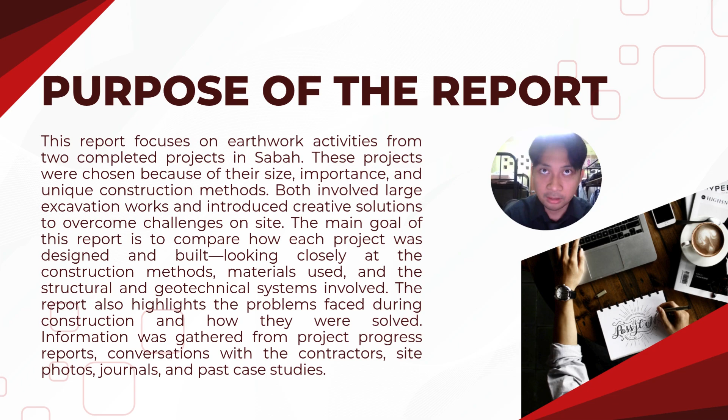The main objective for this report is to do a comparison between the characteristics of soil, problems and solutions that have been faced and taken, and construction technique.

What is earthwork? Earthwork is the work that involves digging, moving, and compacting soil and rock to prepare the ground before building anything. The tasks include clearing the site, excavation, cut and fill, and compacting the soil.

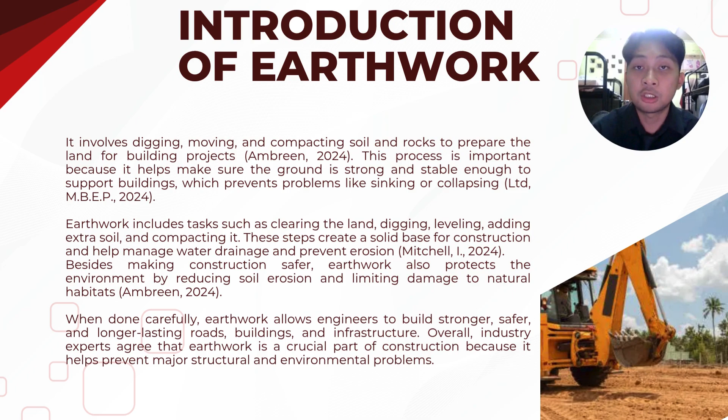Earthwork is also a crucial part because it can help to strengthen the ground to support buildings, prevent settlement and structural failure, and it can also improve drainage and reduce erosion. The important part is it can ensure the safety of the occupants of the building.

The first project that I will be presenting is Menaiktaraf Jambatan Sungai Moyog, Stesen Perikanan Babagon, Kampung Timpango, Kampung Lotong Penampang. This project was carried out by Bisajuta Sdn Bhd. The contract value for this project is RM 16.8 million with a 24 month construction period.

This project was officially started on 10 July 2022 and successfully completed on 9 July 2024. This project was part of the government initiative to improve rural infrastructure in Penampang, aiming to stimulate economic activity in the region.

The primary objective was to upgrade and enhance the existing bridge crossing Sungai Moyog, which plays a vital role in connecting Stesen Perikanan Babagon with the nearby villages of Kampung Timpango and Kampung Lotong.

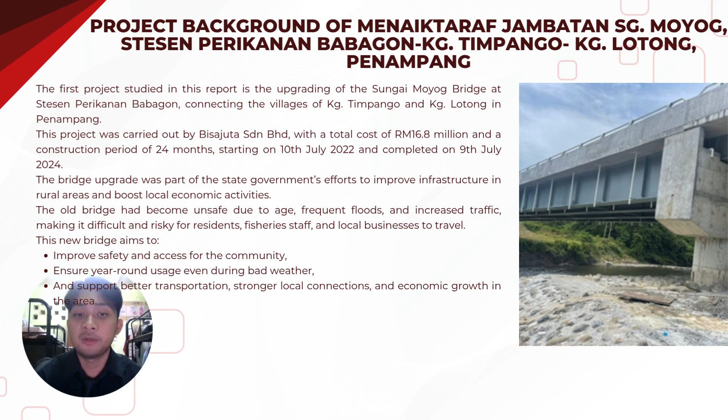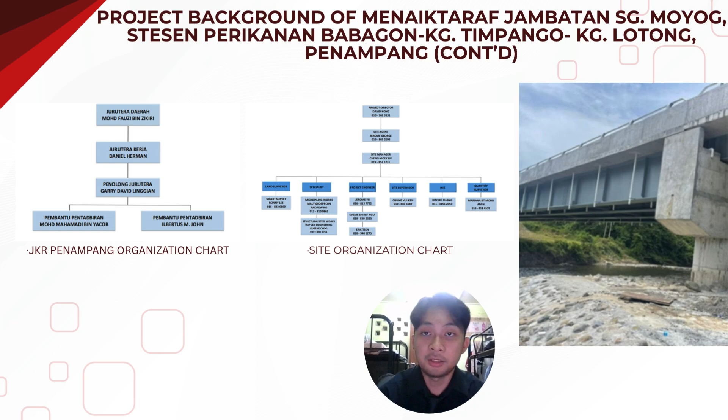So these are two organization charts that we can see. The first one is the JKR organization chart on the left, and on the right is the site organization chart.

Now, let's look at the geotechnical conditions at the project site for the Menaiktaraf Jambatan Sungai Moyog, Stesen Perikanan Babagon, Kampung Timpango, and Kampung Lotong Penampang. As we can see, the perimeter around the project site is primarily composed of alluvial soil, which is typical of floodplain areas along rivers such as Sungai Moyog.

These soils are generally a mix of silty clay and sandy loam, and these types of soil are known to have moderate to low shear strength, susceptibility to erosion and settlement, especially when water saturation is high. For the engineering challenges, due to these characteristics, this soil type presents geotechnical challenges, particularly when the site is exposed to heavy structural loads, and seasonal or constant high moisture content.

For the geological context, according to the Geological Survey of Malaysia (JMG 2017), Penampang is classified under the Quaternary alluvium zone. This means the ground here consists of unconsolidated sediments, including clay, silt, sand, and gravel.

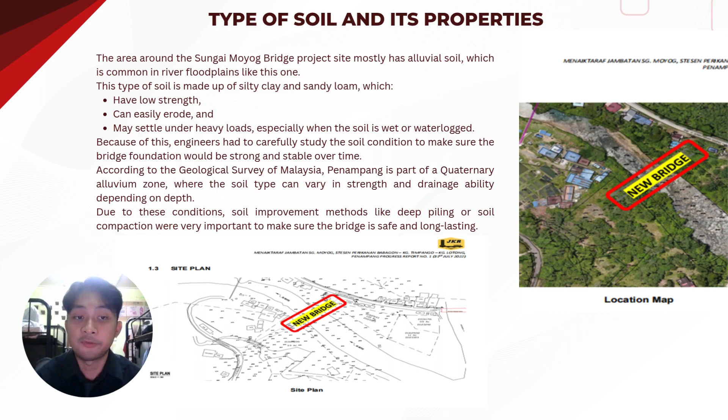For the required soil improvement measures, given this soil condition, the project's soil improvement practice needs to cover, for example, deep piling to reach more stable load bearing layers. The next one is compaction methods. It can help to improve surface soil strength and reduce settlement risk.

The next slide is scope and magnitude of earthwork operations. In this part of the presentation, I will explain the type and extent of earthwork activities involved in the Menaiktaraf Jambatan Sungai Moyog project. This project requires significant earthwork operations due to the flood-prone nature of the area and the existing topography. The major earthwork activities include site clearing, heavy excavation, grading, and construction of embankments.

For the excavation and backfilling, excavation involves removing unsuitable materials such as soft alluvial soils, vegetation, and organic matter. The backfill will be compacted to meet the required design strength and restored to the correct elevation for the bridge foundation and approach roads.

For the site challenges and soil stabilization, given the high water table and the potential for seasonal flooding, enhancing the load bearing capacity and drainage around the site is crucial. To tackle the variable soil profile, additional measures may be needed, such as soil replacement and mechanical stabilization using crushed aggregates or geotextile.

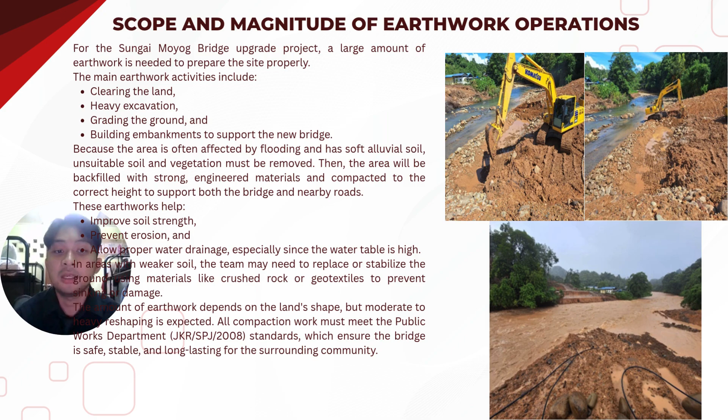This must comply with the Public Works Department Malaysia JKR standard specification for roadworks JKR SPJ 2008. For the importance of proper earthwork, proper execution of earthwork is critical because it helps to ensure the structural integrity of the bridge, the safety of users, and the resilience of surrounding communities.

Next, I will present the types of heavy specialized equipment that have been used in this project. Why are equipment and tools very important? Several key machines will be mobilized for site clearing, excavation, and material handling. For example, hydraulic excavator. The purpose is for general excavation and trenching work. Bulldozer is to clear, level and grade the site.

Backhoe loaders are used for versatile tasks involving digging, loading, and transporting materials. And the dump trucks are used to transport excavated soil and construction materials to and from the site. The compaction and foundation equipment ensure ground stability and proper compaction. The tools and equipment that have been used are vibratory rollers and compactors. These can help compact fill material to the required strength.

Next one is piling rigs and rotary drilling machines. They are essential for deep foundation work, especially in weak or waterlogged soils typical of the area. For the concrete work and structural elements, the tools and equipment used are concrete mixers and pumps, which are generally used to mix and place concrete. Bridge abutments and decks will be cast in place to help strengthen the integration with the foundation. For surveying and alignment, total stations and GPS instruments have been used.

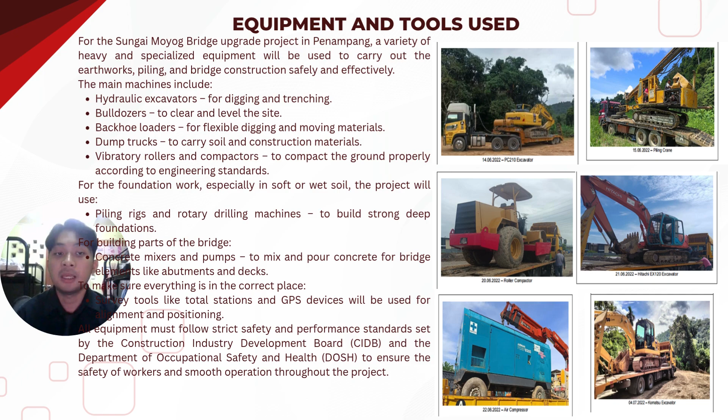For safety and operation integrity, throughout the project it is critical that all machinery and tools adhere to international and national safety standards, in full compliance with Construction Industry Development Board CIDB 2020 and Department of Occupational Safety and Health DOSH regulations. This helps ensure worker safety and equipment reliability are top priorities during the entire construction process.

In the next slide I will explain the earthwork construction techniques used in this project. The first stage is site clearing and grubbing. The objective is removing vegetation, topsoil, and organic matter, including any materials that compromise the foundation strength. The second stage is excavation to stable subgrade. The goal is to reach a stable subgrade, because under the JKR standard specification for road works, JKR SPJ 2008, all unsuitable material must be replaced with approved fill materials meeting specific gradation and compaction standards.

The third stage is embankment construction and compaction. After excavation, well graded sand or gravel is used as fill material, placed in horizontal layers, and vibratory rollers are used for the compaction works.

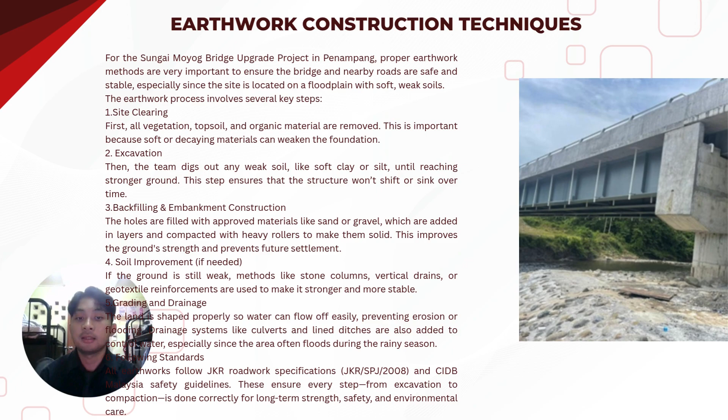Ground improvement techniques, if required: in areas with very weak soils, methods such as preloading with vertical drains, stone columns, and geotextile reinforcement are considered. These enhance shear strength and settlement resistance. From this project, our group has identified four problems, and we have also given solutions to counter them.

The first problem is soft and weak subsoil conditions. As I mentioned before, the construction site lies on alluvial floodplain soil, mostly soft clay, silt, and organic matter. These have low bearing capacity, which can cause excessive settlement and foundation instability. For the solution, the contractor can implement deep foundation systems such as bored piles or driven piles to transfer loads to deeper, more stable strata, and use ground improvement techniques such as preloading with prefabricated vertical drains and stone columns to speed consolidation and improve soil strength.

The second problem is flooding and high water table. The site is prone to seasonal flooding, especially during monsoon season. This poses risks such as construction delays, damage to temporary structures, and compromised fill compaction quality. For the solution, the contractor may develop a comprehensive flood control and stormwater management plan, including temporary diversion channels, cofferdams for safe substructure construction, and drainage systems.

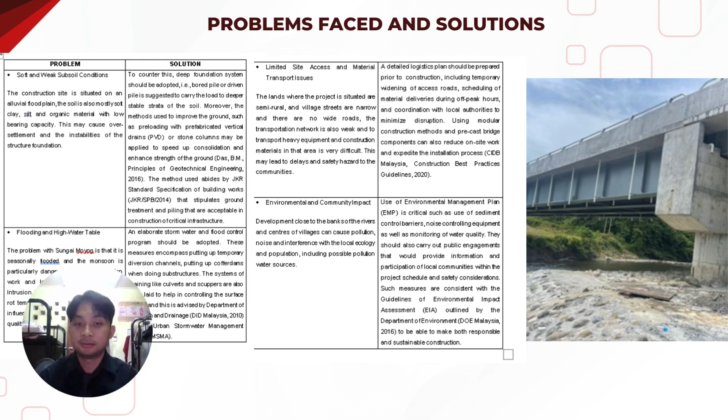Hello, my name is Thompson Jeffrey Edward, and I will explain on the earthworks carried out for the school project in SK Batu Tiningkang, Tenom. This project involved the reconstruction of a dilapidated school under the Daif Sabah program, with a contract value of 42.35 million ringgits and a duration of 30 months.

It was part of a federal initiative to upgrade rural schools in Sabah, with over 230 schools completed as of May 2025. The soil on this project was tropical residual soil with a high iron oxide content. It was known locally as Tanah Kuning.

This soil type has medium plasticity and low permeability, but it is sensitive to moisture, especially in high rainfall areas like Tenom. Because the soil isn't uniform, the team had to manage weak spots carefully during earthworks. The scope of earthwork involved was site clearing, bulk excavation, backfilling, and leveling. The existing terrain was hilly and uneven.

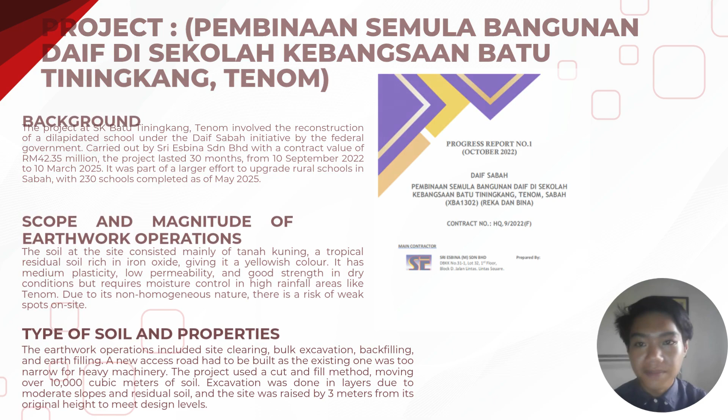Meanwhile, the original access road was too narrow for heavy machinery. To resolve this, the construction team built a temporary access road. The cut and fill excavation method was used, where soil from higher ground was cut and used to fill lower areas. This helps to create a level platform for the building. Now I will explain on how the works was executed on site, the techniques used, and the challenges faced.

For this project, the earthworks was carried out using hydraulic excavators, wheel loaders, compactors, and 10-ton lorries. These machines were selected because they were well suited for the cohesive and slightly cemented type of soil found at the site. Excavators were used to cut and remove soil, which was then transported by the lorries.

Wheel loaders spread the soil at fill areas, and compactors were used to compress the soil in layers, ensuring it reached the required density. In certain weak areas, lime stabilizers were applied to improve soil strength and reduce moisture sensitivity.

This site adopted the cut and fill excavation method, which is efficient for transforming uneven slope terrain into a level platform. This involved cutting soil from higher ground and filling lower areas using excavated material. Firstly, a topographic survey was done to plan out the cut and fill zones. Topsoil containing organic material was then removed since it was not suitable for structural support.

Excavated soil is then transported and placed in fill areas in around 150 to 300 millimeter layers. Afterwards, each layer is compacted before adding the next. A temporary drain was also installed around the site to prevent soil erosion from surface water. This project faced two main challenges.

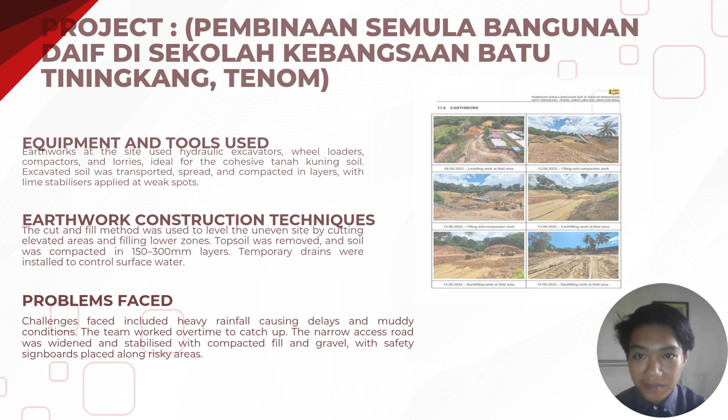So we'll talk about the common issues in earthwork operations. One of the most pervasive challenges in earthwork is soft and weak subsurface conditions. For example, sites located at alluvial floodplains often consist of unstable layers, clay, silt, and organic materials. These materials have low bearing capacity, increasing the risk of settlement and structural failure. To mitigate this, engineers must conduct thorough geotechnical investigations and consider solutions like soil stabilization or deep foundations.

Next, high water table and seasonal flooding pose significant risks. Excess water can delay timelines and compromise the quality of compacted fill, leading to long-term instability. Proactive measures such as dewatering systems, proper drainage design, and seasonal planning are essential to keep projects on track and ensure soil integrity.

Next is logistical challenges, like restricted site access or narrow village roads that can hinder equipment movement and material transport. This escalates costs and delays. Early route surveys, community coordination, and phased deliveries are practical strategies to minimize disruption.

Lastly, environmental and community concerns cannot be overlooked. Earthwork often generates noise, water pollution, and ecological disruption, leading to regulatory or public backlash. Adopting best practices like silt fences, noise barriers, and stakeholder engagement helps align projects with sustainability goals and social license to operate.

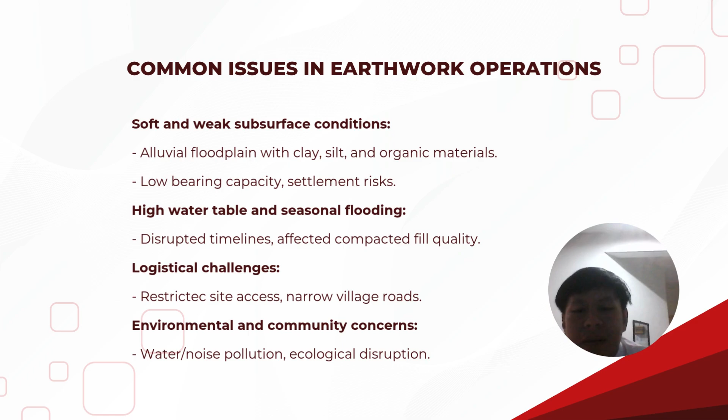Now I will talk about the solutions implemented and their effectiveness. Soft soils, such as those found in alluvial floodplains, require robust engineering solutions. Two primary approaches have proven effective. Firstly is deep foundation systems. Techniques like driven piles and bored piles transfer structural loads to stable strata, mitigating settlement risk. Ground improvement: methods such as preloading, vertical drains, and stone columns enhance soil strength and accelerate consolidation.

For flooding, firstly is stormwater and flood control. Installing cofferdams and culverts diverts excess water, protecting the work area. Other than that is dewatering systems. Temporarily lowering the water table ensures dry conditions for compaction.

Next is for logistics. Firstly is temporary road widening, facilitating equipment movement in confined areas. Next is precast modular components, reducing on-site work and transport frequency. Last but not least, for environment and the community. Environmental management plans help in erosion control, noise reduction, and pollution monitoring. And public engagement helps in regular updates and grievance redressals, fostering community trust.

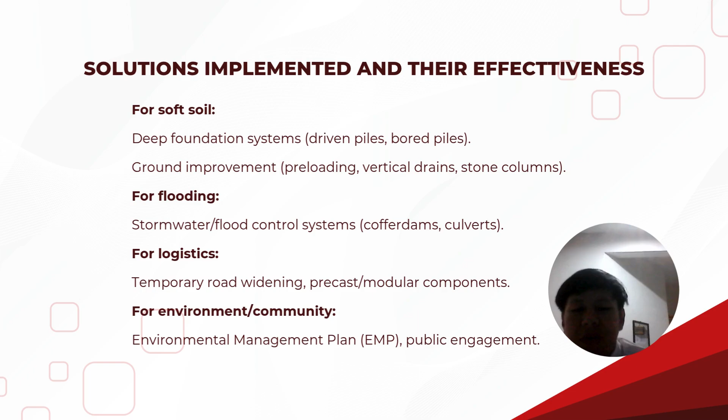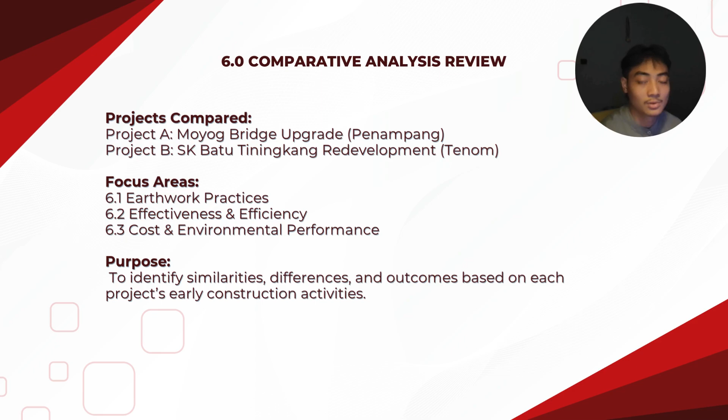So for the comparative analysis review, we're gonna compare two projects, which is Project A and Project B. So the main focus for this comparative analysis review are the earthwork practices, effectiveness and efficiency, and the cost and environmental performance. So the purpose for the comparative analysis review are to identify the similarities, differences, and outcomes based on each project's early construction activities.

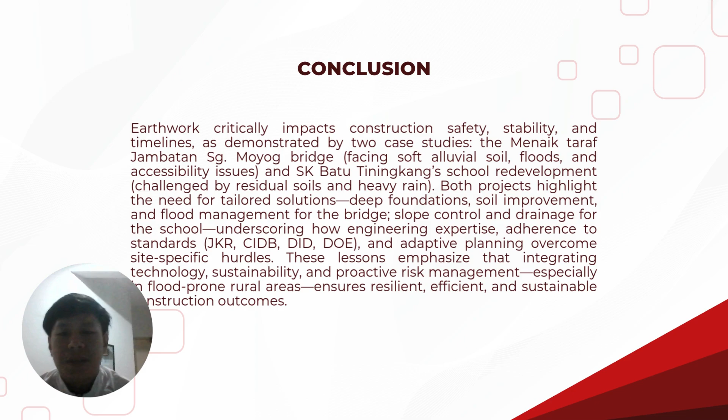So the lessons learned and best practices are: these projects highlight universal lessons for resilient construction, such as adherence to standards. Compliance with JKR, CIDB, DID, and DOE guidelines ensures quality and safety. Second is the tailored solution. Site-specific strategies like deep foundations or slope control are non-negotiable. Thirdly is proactive risk management. Flood mitigation and soil testing must precede construction. Sustainability and technology, leveraging eco-friendly practices and tools. For example, GIS or sensors enhance efficiency.